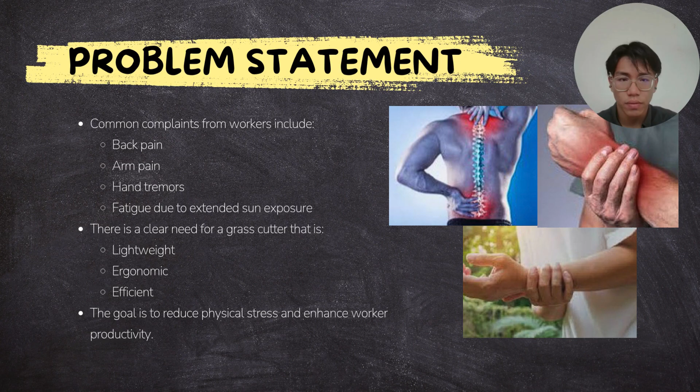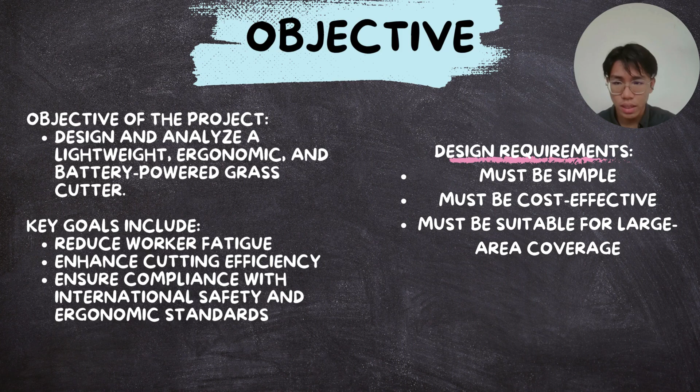So the objective of this project is to design and analyze a lightweight, ergonomic, and battery-powered grass cutter that reduces worker fatigue, enhances cutting efficiency, and adheres to international safety and ergonomic standards. The design should be simple, cost-effective, and suitable for large area coverage.

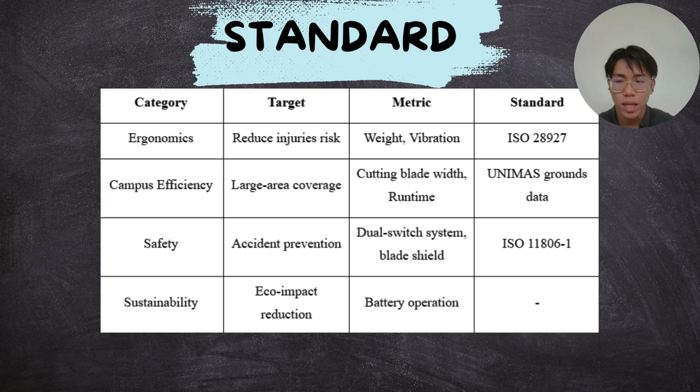Following the standards, our grass cutter design follows four key standards: ergonomics to reduce injury risk, efficiency for large area coverage, safety with dual switch and blade shield, and sustainability using battery power, all based on ISO and UNIMAS standards.

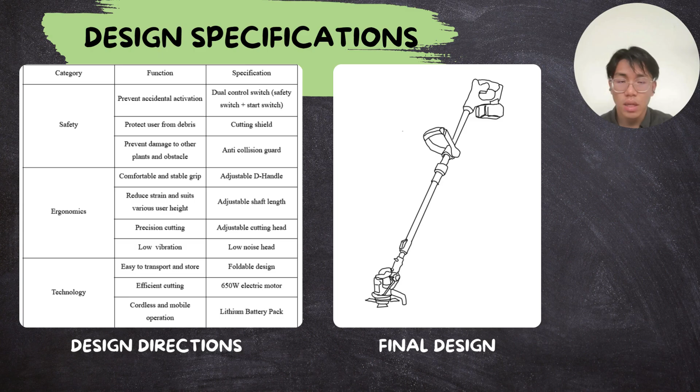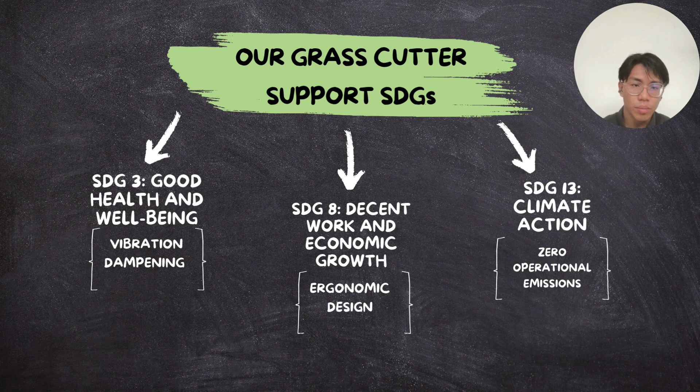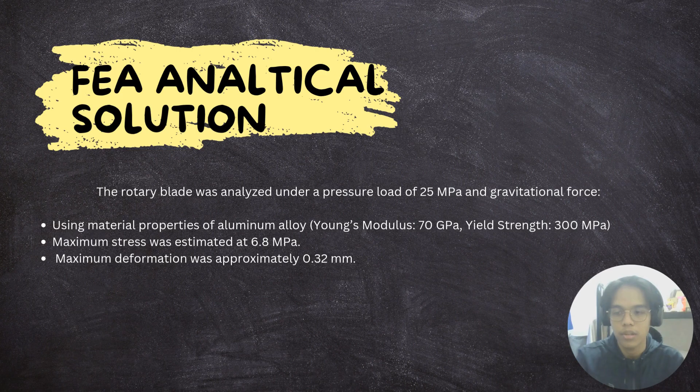For this session, I'm covering the analytical calculation of the stress and deformation experienced by our blade. We assume the blade behaves like a cantilever beam, fixed at the center and extending outward. The material is aluminum alloy with a Young's modulus of 70 GPa and a yield strength of 300 MPa. The blade experiences both centrifugal body loads and pressure during operation. Our goal is to validate its mechanical strength before we move on to simulation.

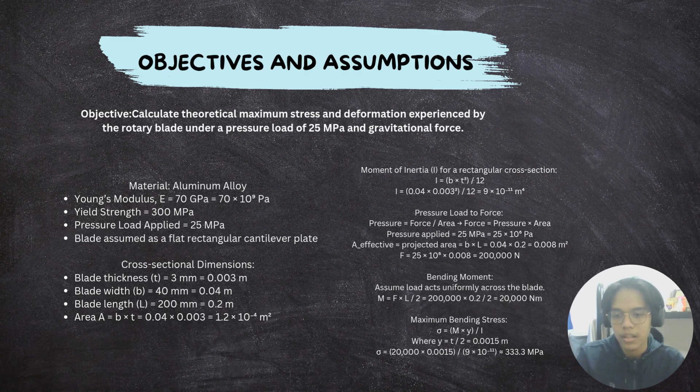In summary, the blade operates far below yield strength, deflects only slightly, and maintains structural integrity under load. These results give us great confidence in the safety and reliability of our design.

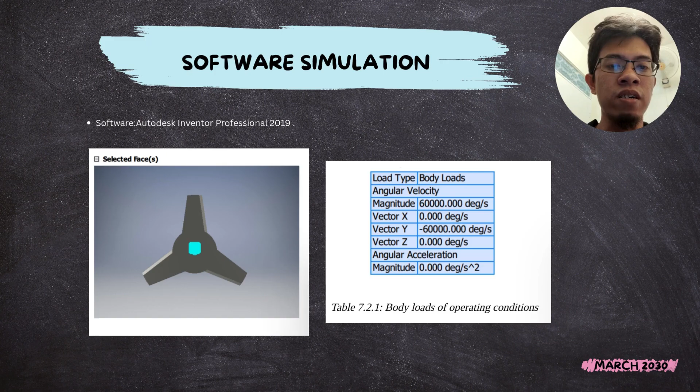Then for applied force, we're gonna use the body load to approximate its centrifugal force. Therefore, we're gonna use the angular velocity of 60,000 degrees per second. And here are the simulation results of the analysis report.

As you can see from the von Mises stress, the maximum stress experienced by the blade is at the edges of the blade nearing the center, with maximum stress of 79 megapascal. Then for displacement, the maximum displacement of the blade is at the end of the blades at 0.025 millimeters.

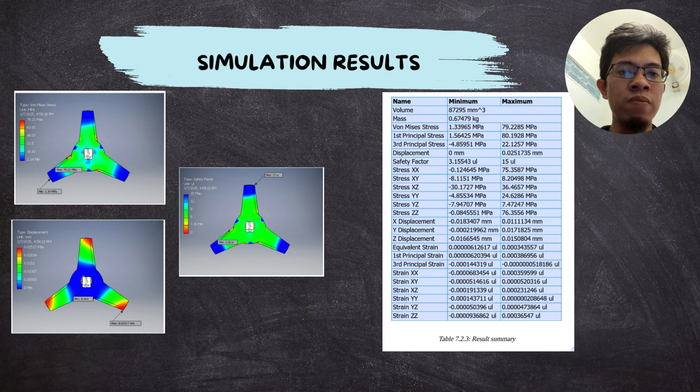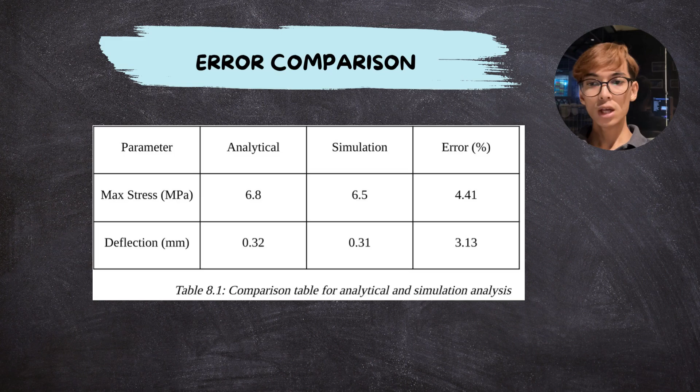And for safety factors, we can say that the blade will not experience any failure as its minimum safety factor is at 3. The differences between analytical and simulation results were minimal, with less than 5% deviation. This validates the accuracy of the theoretical model and confirms the reliability of the simulation setup. Sources of error include boundary condition assumptions, mesh resolution, and material property approximation.

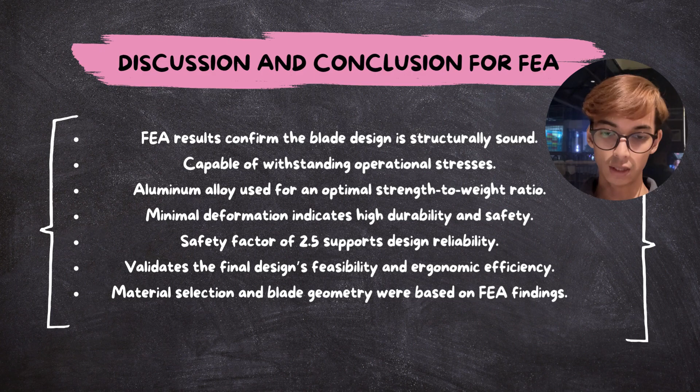The analysis results demonstrate that the blade design is structurally sound and capable of withstanding operational stress. The use of aluminum alloy ensures a balance between strength and weight. Minimal deformation confirms the blade's durability and safety. The safety factor of 2.5 supports the reliability of the design. These findings validate the feasibility of the final design and its suitability for ergonomic and efficient grass cutting. Design decisions such as material selection and the blade geometry were influenced by these results.